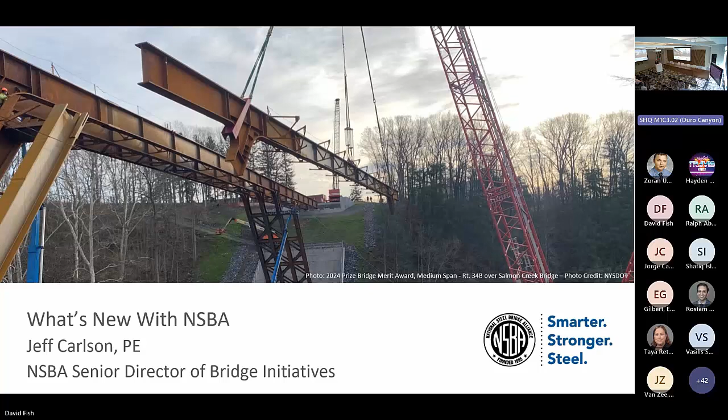Hi, good morning, everyone. Thanks for being here today. It's funny, we drove by that bifurcated on-ramp for 71 and 35 this morning talking about it, so very ironic that came up again. My name is Jeff Carlson, I'm the Senior Director of Bridge Initiatives for the National Steel Bridge Alliance. Got a short 15-minute update on what's new with NSBA and AISC, some new initiatives we have going on, a lot of educational opportunities coming up, one of them in 2 days that I think a lot of people will be interested in. So I'll just get right into it here.

So some upcoming events. First one I'm going to mention is our steel conference, NASCC. As a part of that, we do our World Steel Bridge Symposium. We have 25 bridge sessions, 1-hour bridge sessions, and these cover anything from fabrications to projects to academic presentations. A lot of new sessions this year. I'm actually working on the schedule as we speak.

As most people know, or at least at TxDOT, we do free registration and free travel. So anybody from TxDOT can come, and there's no limit on how many, and we will pay for your registration and also pay for your travel expenses. We don't pay for extracurricular entertainment afterwards, but we do pay for travel, hotel, airfare, taxis, and stuff like that. So if you're interested, I know David is well aware of this, and Jamie Ferris is as well. Please talk to anybody if you're interested in coming to the event. It's in Louisville, Kentucky this year.

Here are some notable events. A lot of things on various projects. We do have a 2-hour industry roundtable where we hope to invite contractors, fabricators, design consultants, talk about any pressing issues that need to be discussed.

We are also hosting a constructability workshop. It's a 4-hour workshop on Tuesday afternoon from 1 to 5. Last year, we had the workshop on curved girder design and fabrication. This year, we're doing one on constructability. If you're interested in that, it's an extra fee, I think it's like $20. The only reason we do that is we want to get people to actually show up, so it causes problems when everybody says yes I'll come since it's free, but then nobody shows up. That really messes up the room size. So again, that's on Tuesday afternoon.

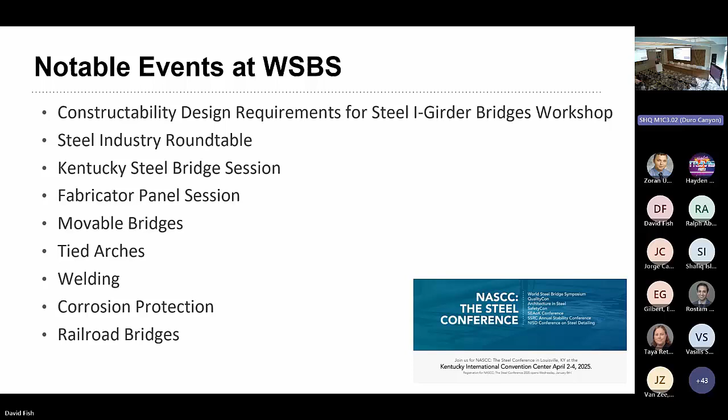We also have a webinar in 2 days. Most people know who Frank Russo is. He's doing a project with us right now on standard plans for modern steel highway bridges. My next slide is some more information on that, but we have a free webinar for DOTs. It's paid for consultants, but all you need to do to register as a TxDOT employee is have an account on our membership portal, on our learning portal, and you can join for free. So if you haven't already and you want to, let me know and I can help get you hooked up to view that for free.

But this is what this project is about. It's part of our Need for Speed project, but essentially it's developing standard plans for 1, 2, 3, and 4 span bridges, all the way up to, I believe, 350-foot span lengths, and this will be for plate girders. Essentially this was built to make it easier to simply pick off a design from the shelf. If you're in an emergency situation or you just want to do a design relatively quickly, you can at least understand what the sizes of the girders are going to need to be in order to get that design done quickly. Now, you still probably need to incorporate your own details or whatever the owner wants for details in that particular state, but this will at least get you 80 or 90% of the way there.

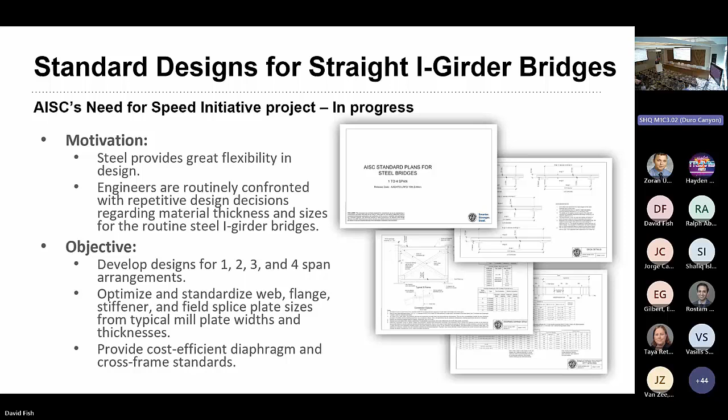Some new resources are coming. This one is finished - our Fundamentals of Steel Bridge Engineering. This is curriculum and coursework for university professors, but anybody can use it - you can use it as a consultant if you want, but it's intended for university professors. We found that a lot of universities don't have the curriculum and expertise within their faculty to teach a steel bridge design course, and that's what this is intended to do.

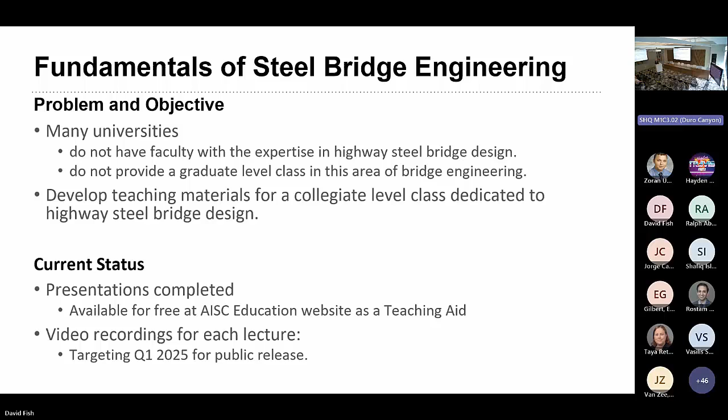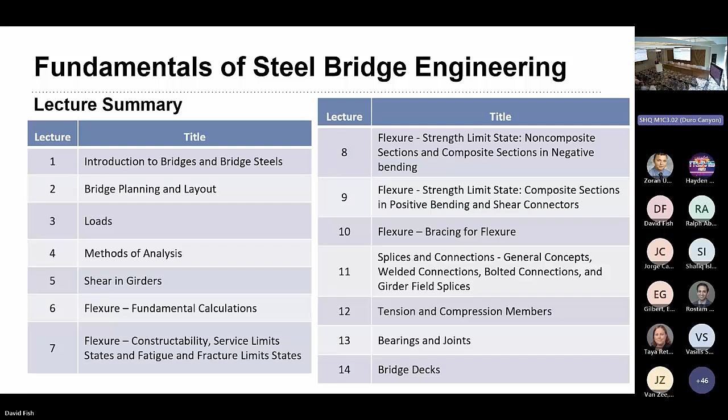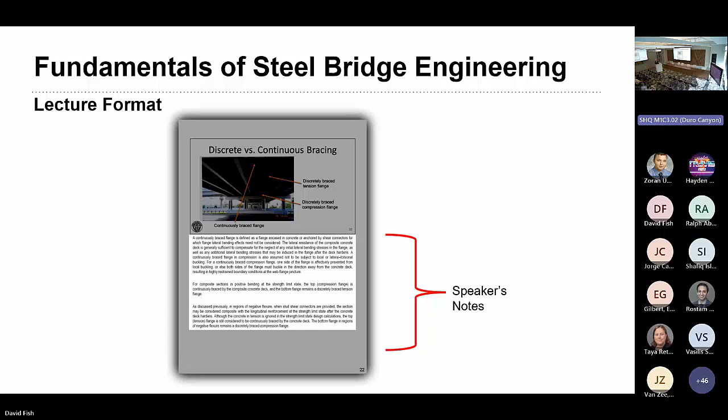The presentations are done. This is a little bit of what's included - I'm not going to read through all of it, but you can see for yourself, anywhere from bridge planning to loads, shear, flexure, bearings, and bridge decks. There's a lecture for each one of these, complete with course notes as well. So this is generally the format - the presentation slide, but then there's also speaker notes for everything, so the faculty member can really go through this and learn how to provide a steel bridge design course to any class they want to teach.

Again, I said this is finished - we are working on the recordings. The recordings are actually done. Frank is recording every single one of his lectures, but we're right now putting together quizzes so we can give out PDH credits for these. That should be available soon, but the presentations are done, so this should be finished hopefully in the near future.

We also want to develop an in-person short course for this - 2 or 3 days, where we would hire Frank or Brandon Chavel, my colleague, or anybody else to come in and deliver a 2 to 3 day short course. We're working on that as we speak, so maybe we can come do one here at TxDOT perhaps.

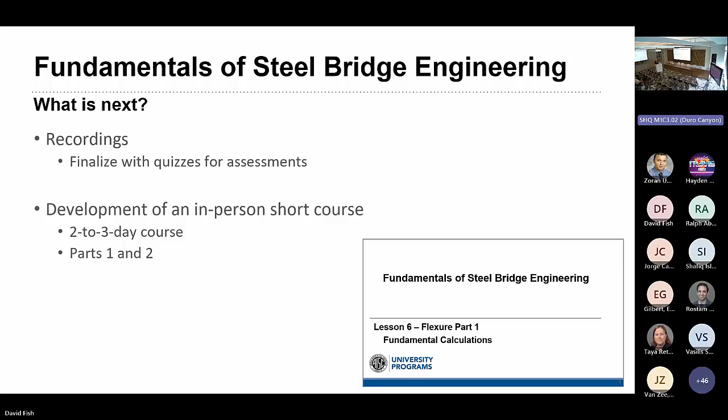Some opportunities there. I want to mention that we do have some resources for railway design - I know this is a TxDOT meeting, but we just want to mention this, it'll be short. We've recently completed an AREMA NSBA collaboration document for guidelines for design of steel railroad bridges for constructability and fabrication. Similar to our AASHTO NSBA collaboration, but this is the initial document we're doing for AREMA. This is free, published on our website - you can get it at aisc.org/RRBridges. That's free, and it's a new document just released in the last couple of months.

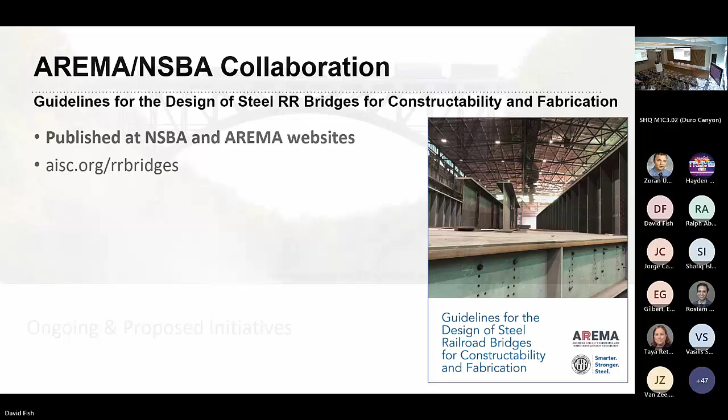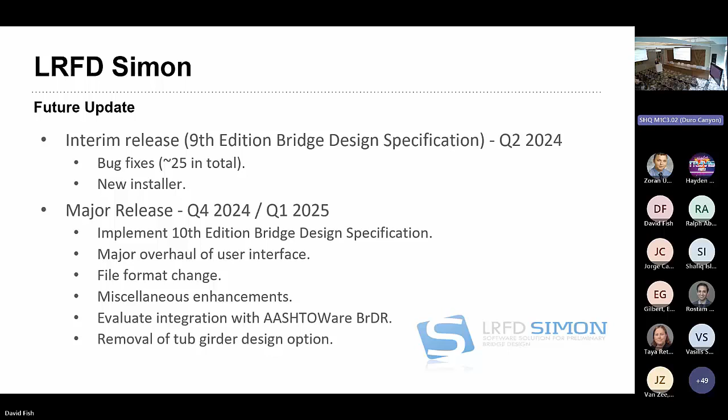Ongoing and proposed initiatives - first of all, a lot of people are probably familiar with our LRFD Simon program. This is free line girder analysis software. We recently finished an interim release, but it's only current to the 9th edition of the AASHTO code. We're going through a major overhaul, and it should be done later this year or first thing next year, where we're going to update everything to the 10th edition bridge design spec, and we're doing a major user interface overhaul as well. If you do go download this, we ask for your contact information only so we can send you updates to the program itself - we're not going to bombard you with solicitations, but we want to let you know when there are new updates coming up. So be on the lookout for that in the near future.

This is something new - it's just in concept right now, but we're in discussions with a consultant to develop steel grade separation bridge standards.

So for a typical grade separation bridge, just like the one you see here, there's a lot of these 4-span grade separation bridges across the U.S. over major interstates out in rural areas. The motivation here is to replace this with a 2-span steel option and to come up with some standard details, standard plans for how this might work.

You might say, well, you already have your standard plans that you just talked about. Well, that's true. We would just use those designs but incorporate it into some sort of package with some details, maybe some integral abutment details or various things to make these more standardized, so that a fabricator or a designer can simply say, hey, just choose option 3 and then call a fabricator. They can say, can you give me a conceptual price for this? And they can get back to you pretty quick with what that might cost. So that's the motivation for this.

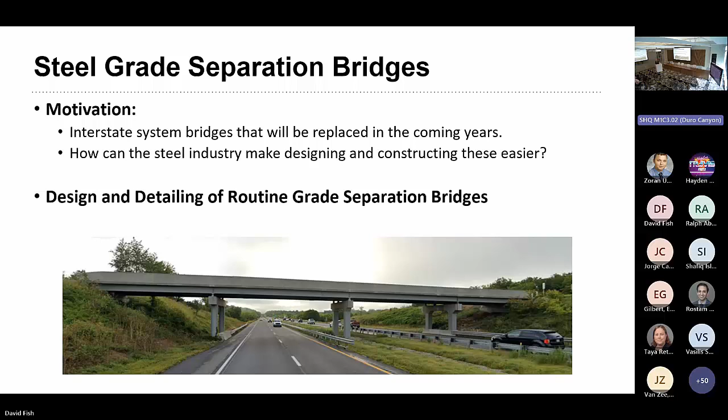This is just in the works right now. It's just getting started. I would suspect to be done in the next year or two would be my guess for that. We have some existing publications that we're updating.

I believe Domenic Coletti was here last year, presenting on the Navigating Routine Steel Bridge Design Guide. This is in the process of being updated, mainly to the 10th edition of the code. Similarly, for the Steel Bridge Design Handbook, that's something we completed a couple years ago where we took it over from the Federal Highway. It's now being maintained by us, and we're giving that an update as well to get it to the 10th edition of the code.

This is something being conceptualized right now, but our AASHTO NSBA Steel Bridge Collaboration Group, TG11, we're discussing with them to do an update to the cross-frame design guidelines. The intent here is to educate engineers about anything related to cross-frames. As we all know, cross-frames are an expensive part on a per pound basis of a steel bridge, and we want to make this more efficient and easier to fabricate for those reasons. This is a document aimed at doing that.

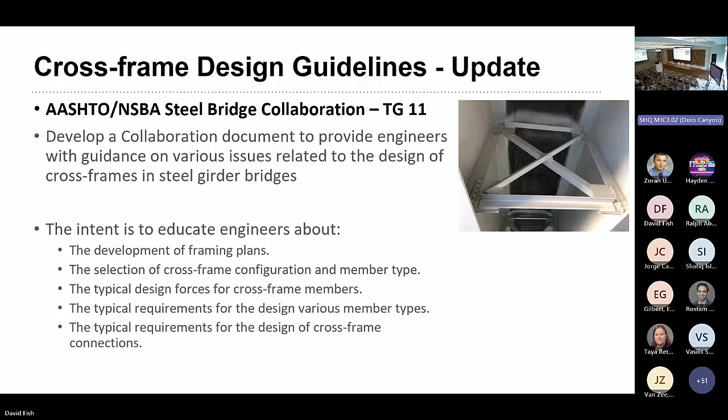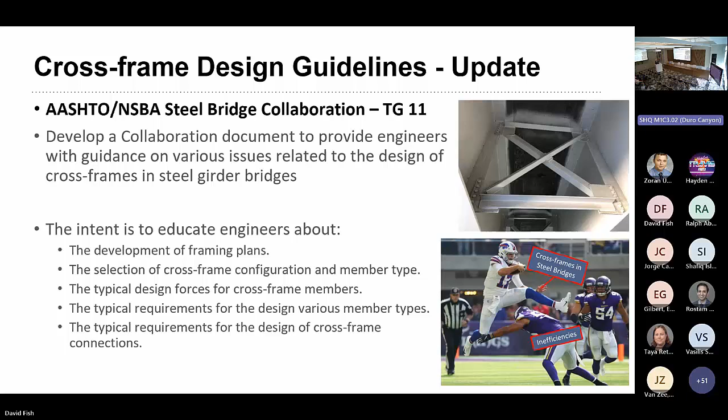I have to give homage to Brandon Chavel, my colleague. He's a Bills fan, so he has to put cross frames and inefficiencies in there—anything to do with Josh Allen, he has to put in. I really should have changed that picture to something Broncos related, since I'm a Broncos fan, but I was unable to update that slide. I regret that already.

And last but not least, this is the intent though. The picture on the right is what we want to avoid in cross frames. That cross frame is way too big and bulky, and we want to provide guidance to engineers so that we can make these cross frames more efficient, because that's one of the more cost-prohibitive items of a steel bridge. The more we can do to help that out, the better. So that's going to be the intent of this document.

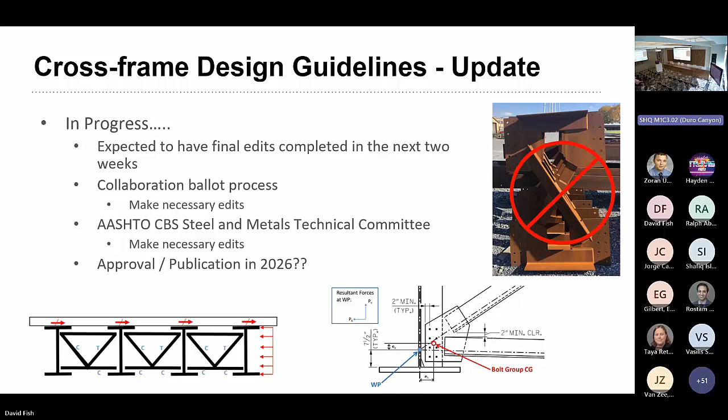Something new—NSBA has recently embarked on an initiative to work with various AASHTO groups.

So how many are familiar with the approval process to get a corrosion protection system? I'm going to use paint in this case to get a paint system approved by AASHTO. How many people are familiar with how that works? Not too many. So you might be familiar with NTPEP. NTPEP is now the AASHTO Product Evaluation and Audit Solutions, I believe. So when I say NTPEP, that's really what I'm talking about. But all they really do is implement the test.

So pretend a coating supplier, whether it be Sherwin-Williams, Carboline, or PPG, comes out with a new paint system. They want owners to use it. They usually have to go through the NTPEP testing. It's not like this works and this doesn't—it's not an approval process. It just evaluates how it performs and gives those results. All NTPEP does is implement those tests. The group that actually writes policy for how those tests are conducted is the AASHTO Committee on Materials and Pavement.

COMP is the acronym. The AASHTO COMP committee really is the committee that dictates how those protocols are run. And so we've started a new initiative to work with them to develop a new testing protocol. The testing protocol is relatively out of date, so we've started a conversation.

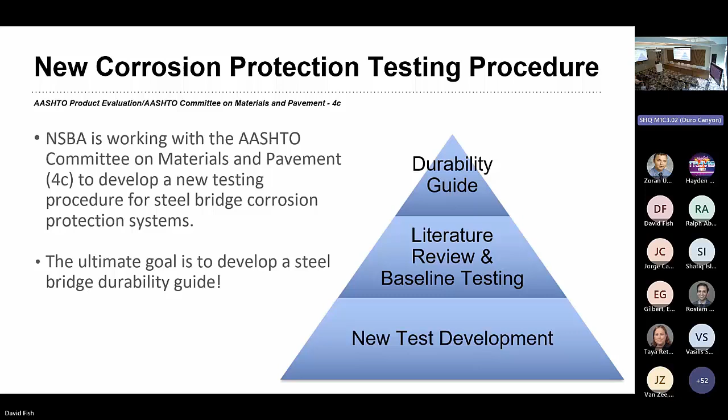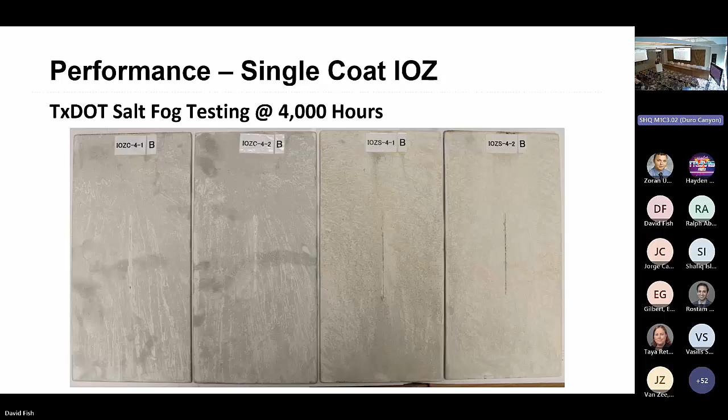But it was understood that a single coat of IOZ will not do well in the NTPEP testing, for various reasons. A lot of it is because the soluble salt used isn't really applicable or representative of the bridge environment. So this is some motivation for why we're going down this road.

If that doesn't work, then perhaps consider paint systems. If those don't work for whatever reason, you could go to hot dip galvanizing or metallized systems. Generally, we recommend starting with weathering steel, then going to paint systems if you have to. Again, this is why we want to get the complete picture for owners in terms of maintaining the bridge, the upfront cost, and the maintenance cost as well. So this is, again, some motivation for what we're doing.

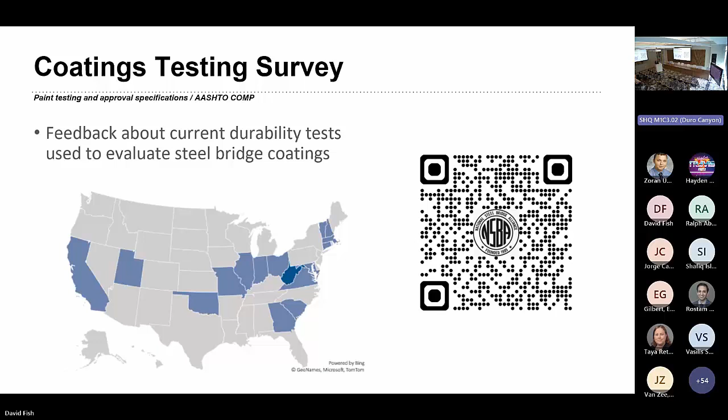I believe we're getting close to the end, and I do want to mention Todd. This is a good lead into his presentation next. He's a recent recipient of the Structural Stability Research Council Award for 2025, the Lynn S. Beedle Award. He's giving a presentation, I believe, in Louisville. If you do attend, I don't know what day that is yet, but it will be in Louisville in early April, so you can be on the lookout for that. Congratulations, Todd. And with that, I believe that's all I have.